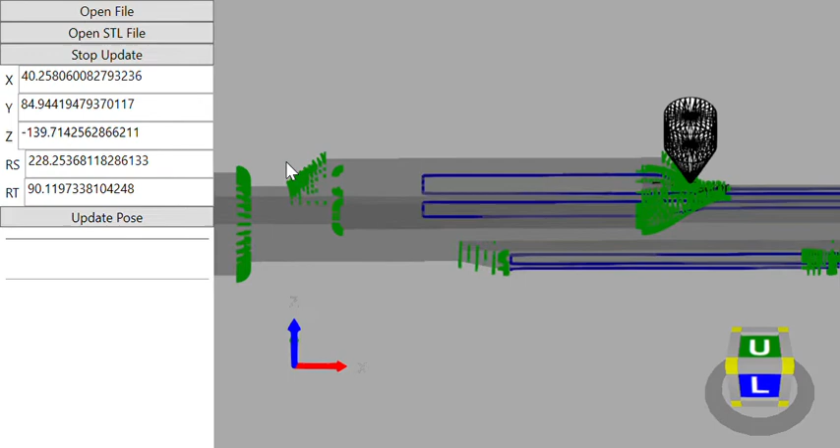My apologies for the length of this video, but it's going to show a print sample of running through the generated print for the grants object. You can see there it just did the first pad on the side, on the left side of the wedge. I have shortened up the length of the traces going down the cylinder just to make this video go a

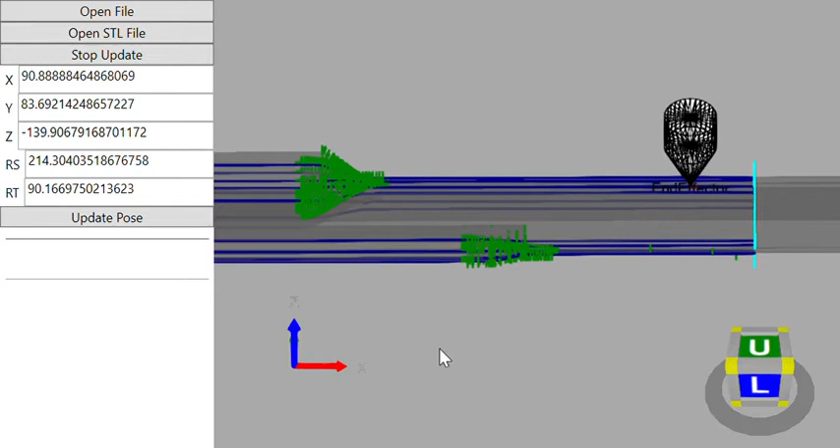little faster. Now it's going to do the pad that is on the outer edge of the left side of the wedge, and you can see it just did a little manipulation to get barely onto the wedge for one side, rotates down to the surface of the cylinder, then it just translates over to the side, which is a rotation of the cylinder to shrink up the lead going down the body.

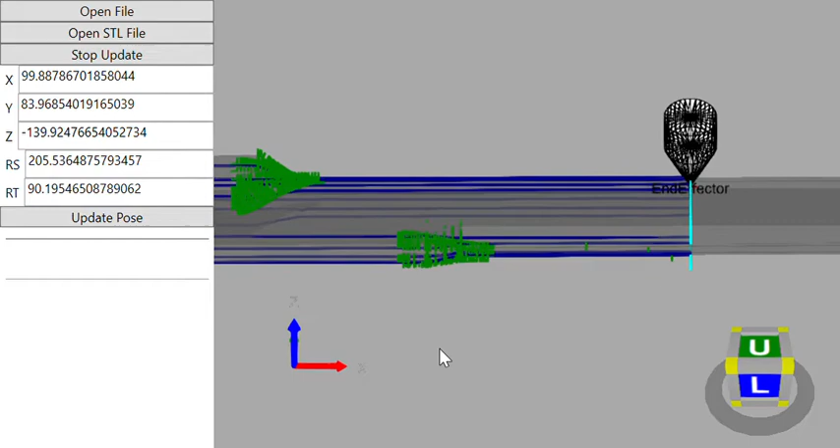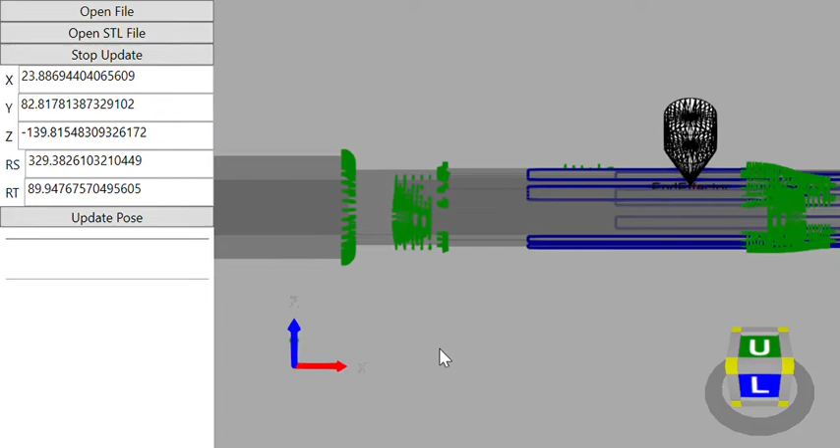Now it's going to spin around and do the first pad on the right hand side of the wedge, which is the pad that is the whole way up on the flat surface of the wedge. The gray that you see in the background is because we have our body being transparent so we can see through it. That's the trace on the flat side of the wedge. And going back down and transitioning, shrinking the line at the same time we're coming down the edge of the wedge. That finishes the trace.

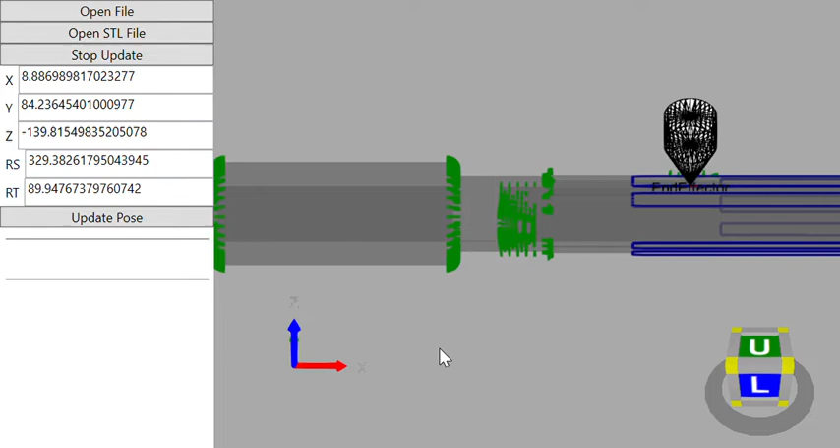And then we're going to do the right hand outside wedge, the trace that barely misses the wedge. So we'll do a little transition as we go right onto the edge of the wedge, and then we'll spin around and come right down the body of the cylinder. But it comes down and shrinks up the line of the trace again to the feed line.

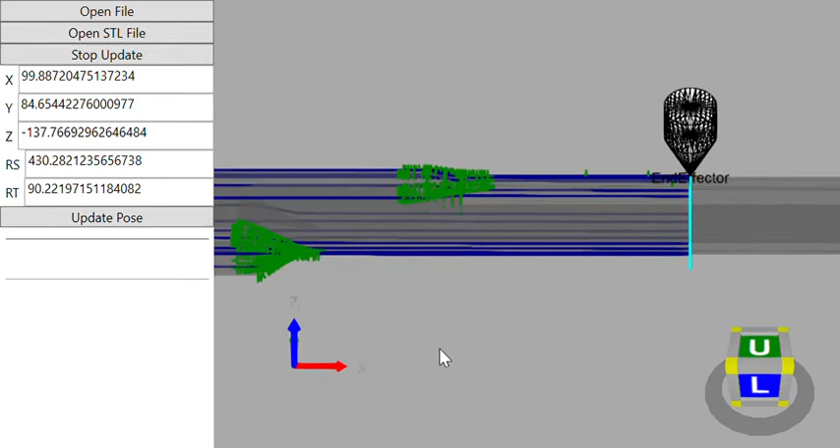Now it's going to spin around to the center of the back. It does the center trace up the bump on the back first, and then it will do the left and the right traces on the back. And we can see that it's coming up the edge of the center trace, the actual left edge, I believe, and then it rotates around to do the right edge, and that one is centered on the bump, and it will go down the ramp to the bump to shrink up that line.

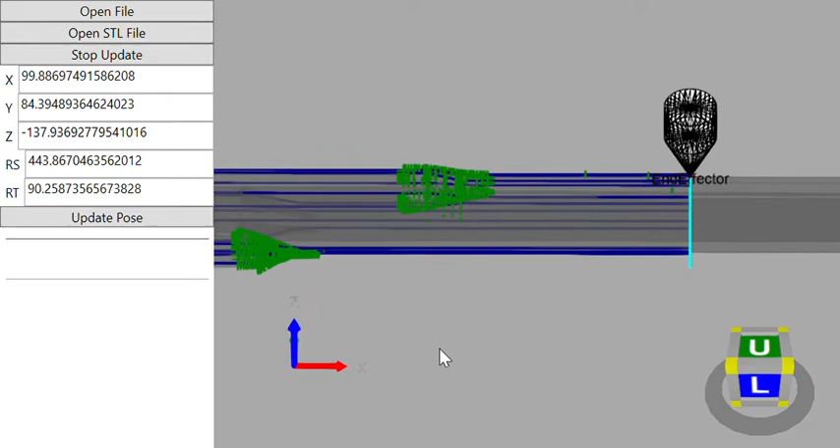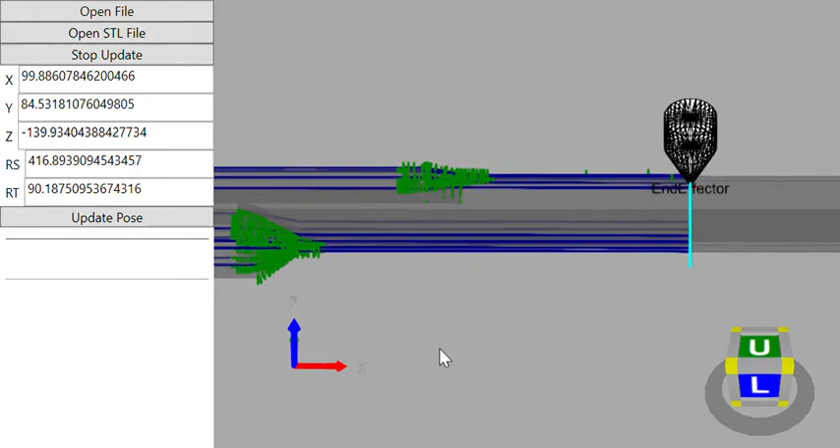Now it will do the left hand trace on the bump, which involves a little bit more of a transition getting onto the bump, and then finishing up the trace on that rounded surface of the bump, and then it comes down. Now I purposely made the right hand trace on the bump the whole way around the cylinder, so what you're seeing now is it spinning the cylinder around to get over to the other edge of the bump.

The timing in this is not based on true print timing. It just takes each move command and gives it 50 milliseconds for this preview. There's no calculation of actual speed.

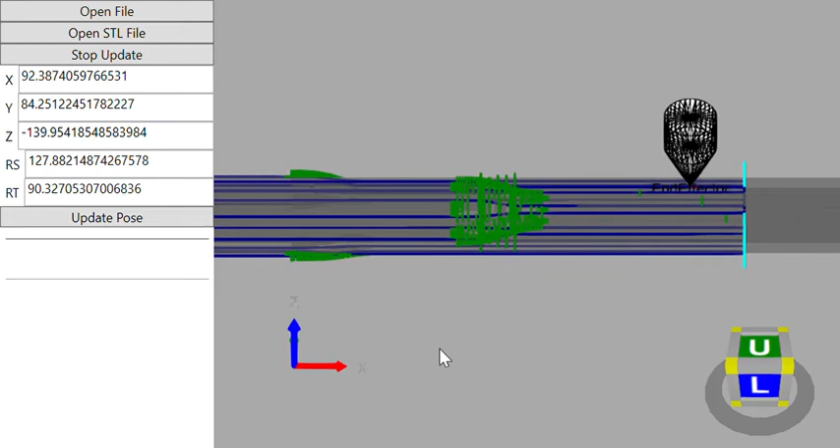So we've arrived. Now we're going up for the right hand trace on the bump on the back, and we're doing the outside line of it first, then we'll turn towards the inside line, and this will just about finish up the print. And the print previewer will loop around and start over again. So that's going back up to the left hand of the wedge.